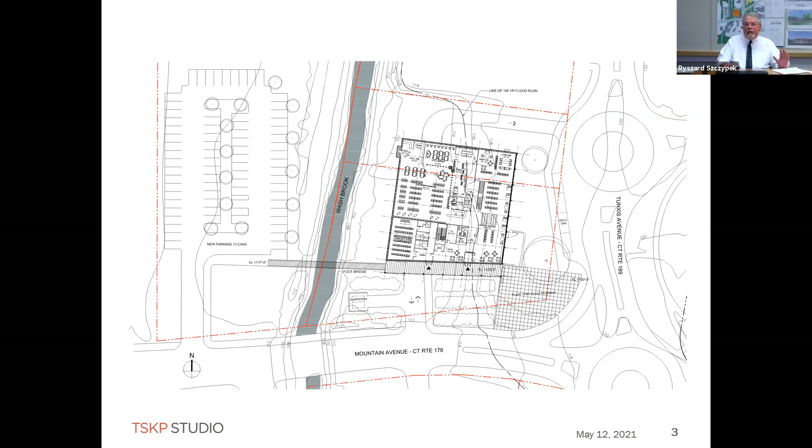So the concept here is to build a very strong connector to the parking area here. What we show in this site plan is approximately 73 cars—actually exactly 73 cars—in this former library lumber yard, connecting to the main level. There's a level below this floor plan, but this is the main level, the level that pedestrians would enter into the building. There are two entrances, as you can see here on the southern side of the building.

This is the main entrance into the library itself that leads into a vestibule and then into the main library room. The circulation desk is located here within plain sight of people coming and going. There's a secondary entrance as well, and this will become an important entrance after hours because it leads into the community space here, a meeting room. There's also bathrooms in this location, and egress stairs, which are important along with the elevator to connect to the lower level and the upper level. The library itself is divided into two floors.

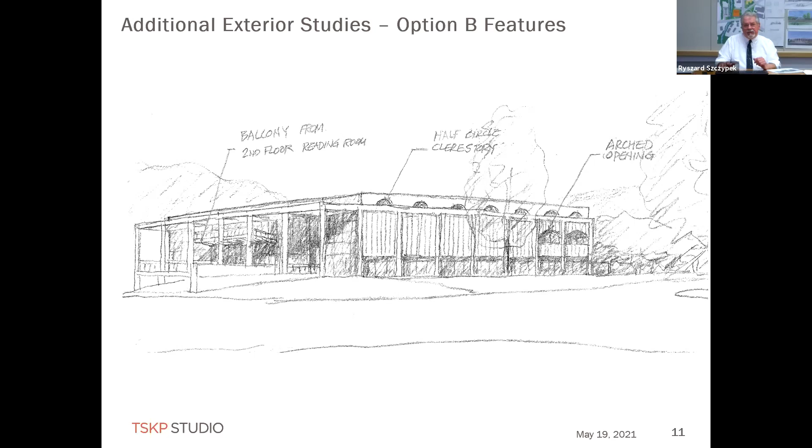We've been working with Downs Construction. They brought in a geothermal consultant as well as a photovoltaics consultant. So geothermal was eliminated from consideration, but photovoltaics are a very realistic option.

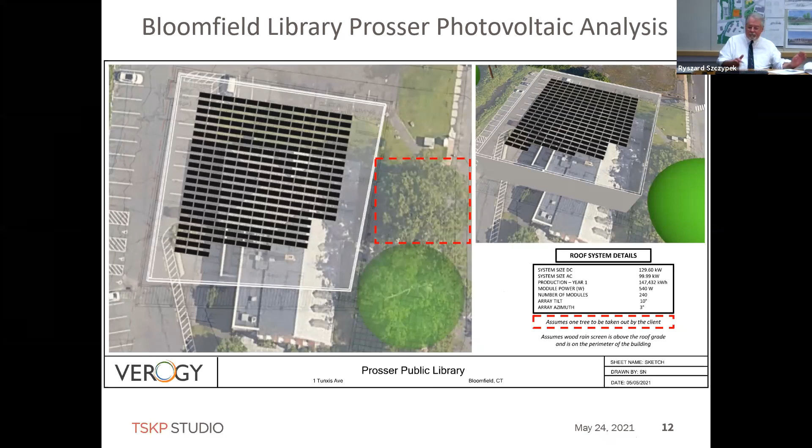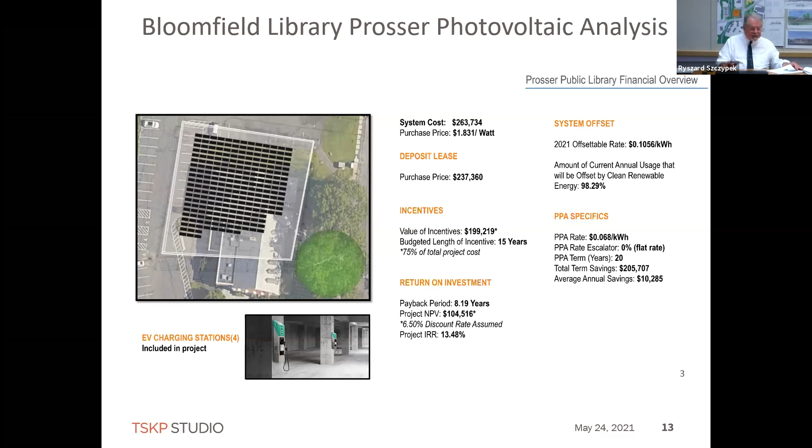Downs brought in a company called Verogy, who did a thorough analysis of the photovoltaic panels that could occur on this building. They described an ideal footprint to maximize the amount of photovoltaics for this building. The photovoltaics here would provide enough energy to serve the library building. They've even done some cost analysis and presented options to the building committee for how to pay for those photovoltaics, but that's still a subject to be discussed with the committee and the town council.

The shaded area represents the footprint of the existing building, and the unshaded area in front represents the new construction. This would be a new entrance and vestibule connecting straight into the building, leading directly to the circulation desk right in front. We'd be renovating the existing building to create a new teen and children's area, with the adult areas placed in front.

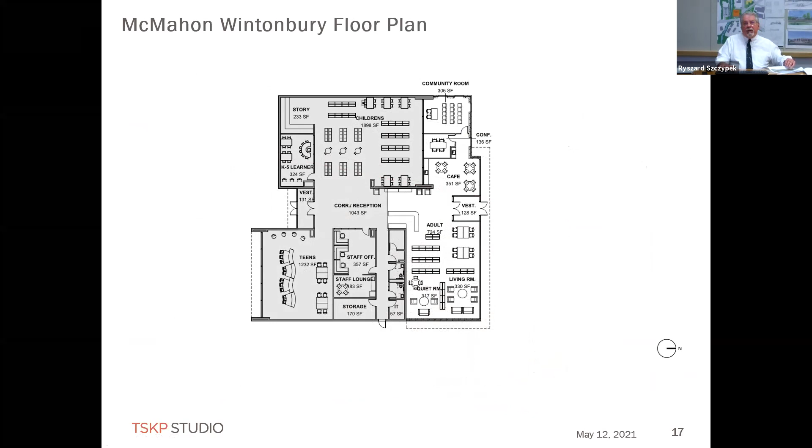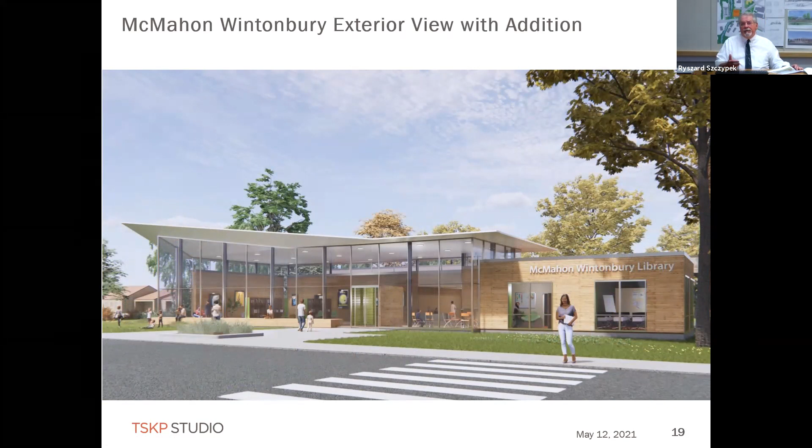We do have some renderings of that as well, which I will show you here. This is one view of the exterior, and looking at it from a slightly different angle is another view of this building. We did receive comments from this as well, and we'll be sharing some revised views. I think the building committee asked us if we could incorporate brick into this exterior rather than a different kind of material.

The plan is to go back to the town council. We've had one presentation with them. We're going back on the 14th of June, and then probably again on the 28th of June, prior to the library submitting a letter of intent to the State Board of Grants for library construction. We're facing a deadline of June 30th to do that.

I'm assuming the town referendum will be scheduled by the town council on November 2nd. After November 2nd, once the project is to be funded, we go to the rest of the design process before we start construction. The rest of the design process is probably 9 or 10 months of detailed work, starting with schematic design right after the referendum, and then going into design development.

During design development is when we start addressing a lot of the site issues that I'm sure are of great concern to this board, as well as planning and zoning and other entities in town—things like floodplain management plan, site utilities, traffic analysis, planning and zoning, wetlands, state and local environmental entities, DOT, etc. All of those get developed, and eventually we will be applying for site plan approval, and that won't happen until August of 2022. So that's where we are in the process.

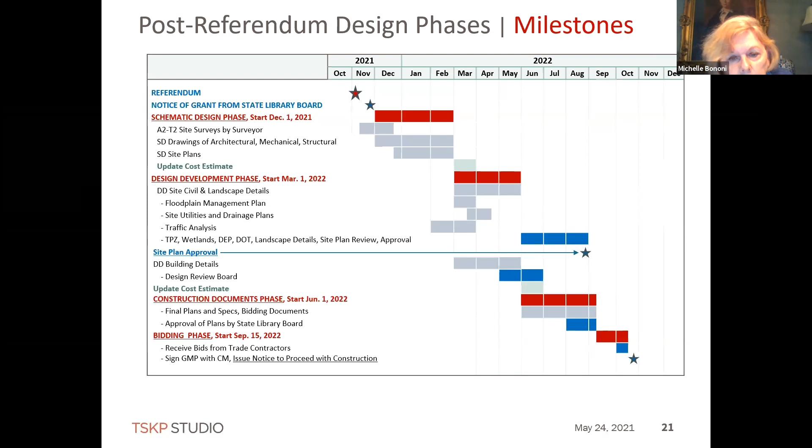Michelle, you want to start it off? I mean, I guess you're on the committee, so, but we'll go in alphabetical order. Oh, I'm not mute—on mute. Michelle, you on mute? Michelle, you're muted. You're still muted. I think I finally got it. There you go. Okay, I would prefer to, being that I have already given my opinions at the library committee, defer to my other committee members first. Give them the first shot.

Okay, Neil? Okay, thank you, John. Yep, thank you for the presentation. This is a big, significant project to sort of digest in one gulp here, and I'll try to be thorough, and yet I'd like to come back maybe later to talk about some things. I'm afraid I might hit this sort of in a shotgun fashion, but I'll start with something that John was talking about earlier in terms of pedestrian traffic and access to that corner.

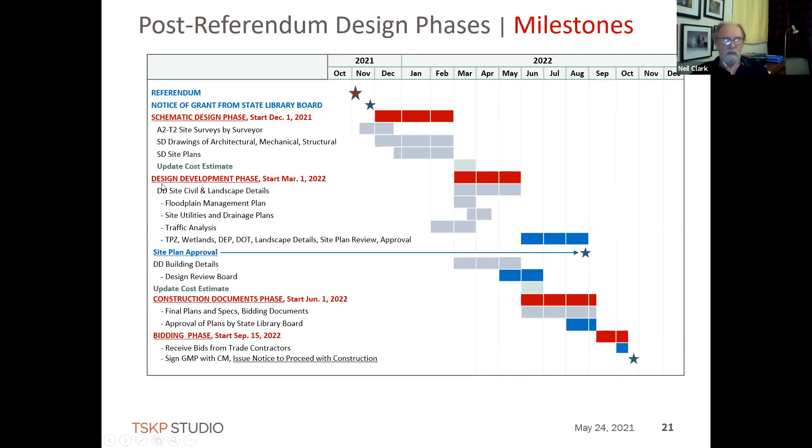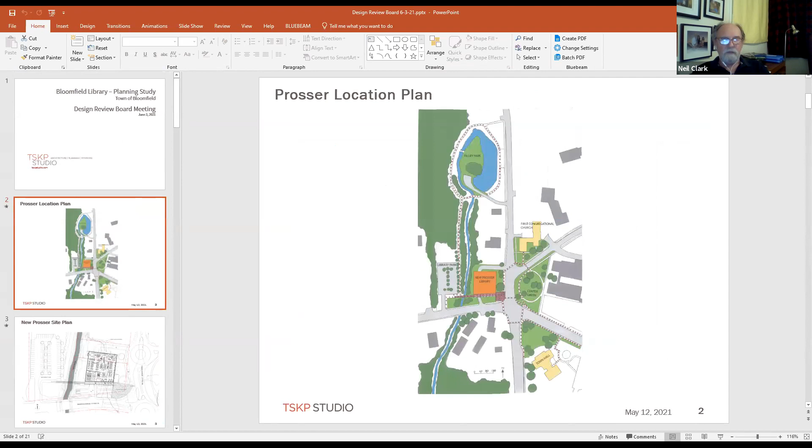I think it's vitally important to this concept that corner be related contextually to the roundabouts and the future pedestrian traffic involved within that roundabout configuration. Pedestrian traffic's going to change just because of the introduction of those roundabouts, and it's going to be an important consideration to get right, and to understand how pedestrians will navigate those roundabouts.

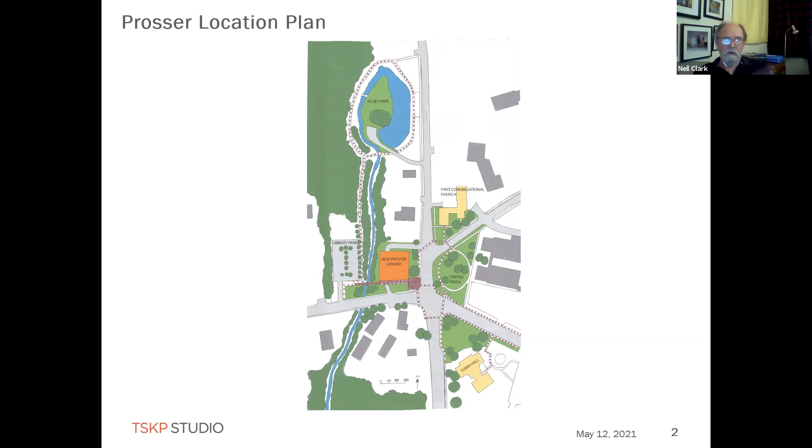You've talked a lot about the south side of the building and the importance of the colonnade, the portico, and yet the south side has this big gaping hole that goes into the underside of the building with a dumpster parked in front of it.

I think if that side of the building is going to be architecturally important, the whole building should be important architecturally. More attention needs to be paid to elements like the dumpster and the garage access underneath, and the landscaping. I like the connection to the Riley Lumber Company site, but I'd like to see it be more than just a little bridge and pedestrian walkway. I'd like it to make more of an architectural statement, something that reflects in different dimensions, maybe a little bump out where people can look at the brook.

Right now it just looks like a little pathway on a slope with a couple of railings on it. I know we're early on in the design of the exterior of this building, and there are opportunities here.

To change and react to what the public is saying, what our group is saying. I think that's good. I think this is a great time to interject these comments and let you guys respond to them. As far as the mass and the bulk of the building and some of the other relationships...

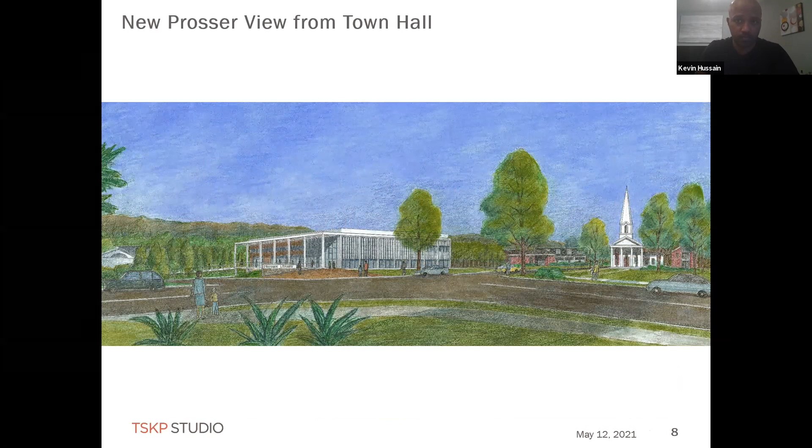You're talking about the lower level? Yes. This level? Yeah, the elevation view now, if you don't mind. There was another one, you had an elevation view. Oh, it was a section actually, a cross section, but similar to elevation.

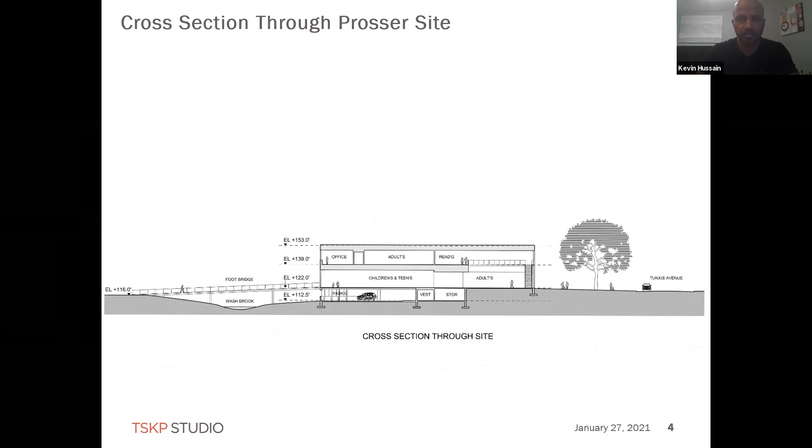Okay, cross section, right. I think this is the part that, like Neil had mentioned, about the dumpster being on one side, and if that's not as welcoming as you want to see. If you go back now to your south elevation view of your actual columns, I apologize, I just wanted to show the correlation here. If there was a possibility to shorten those columns, to move some over to the easterly corner, the southeasterly corner, so it connects into the town green.

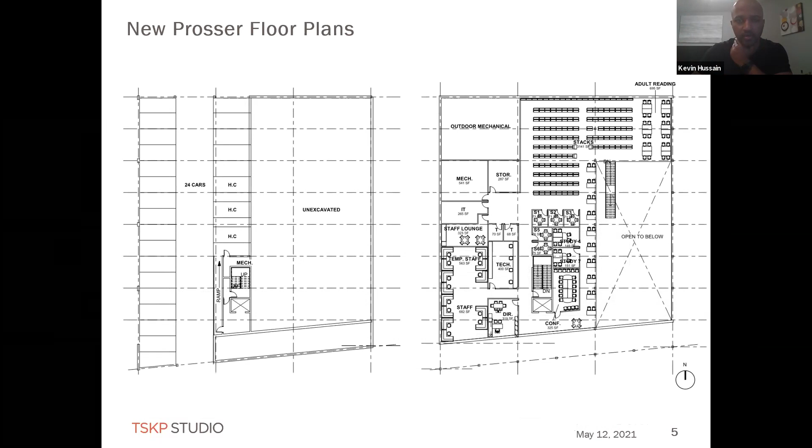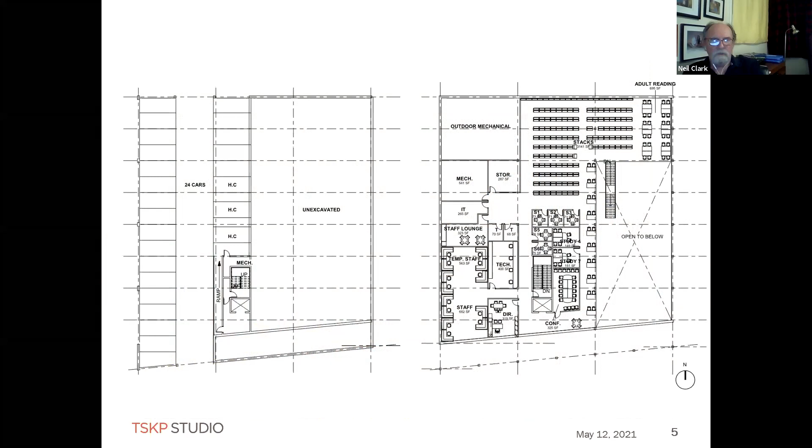Kevin, I think what you're looking for is the drawings, not necessarily elevations, right, that he showed before? Just go back to one of your sketches, one of your conceptual sketches, Richard. Yeah, the drawings... No, I wanted to see that cross section too, I thought the cross section showed the columns. If you keep going one more time, I'm sorry. Okay, the proposed new sketches, I apologize, I should make note of the pages. The sketches you showed, yeah, the sketches you showed. Whatever your last rendering that you showed, it probably showed the arches in the cutout too.

Yeah, like even this one right here, if you go back to this right here. Now these columns, I assume, are trying to carry the dead load of that extended roof, correct? Correct. And that's the only load it's taking on right now, right? Correct.

Yeah, there is some load carrying capacity there, but what I was saying, right where that tree is, we don't want to take it down obviously, but if there's at least a small connection on the eastern side to the town green across the street, I think that would be a little more welcoming, because folks will, instead of staring into these apartments, find it easier on the eye if they look across to the easterly side. To me, the easterly side is easier on the eyes versus the apartments to the south. But I understand the concept where you're going there, that's just something I wanted to throw out on my part.

Like I said, I love the connection with the town and the church, and I don't need to see a lot of bricks too. I'm of a younger family and a younger generation, my kids use this a lot, and I think this would be more engaging and welcoming to them, for that demographic I'm talking about.

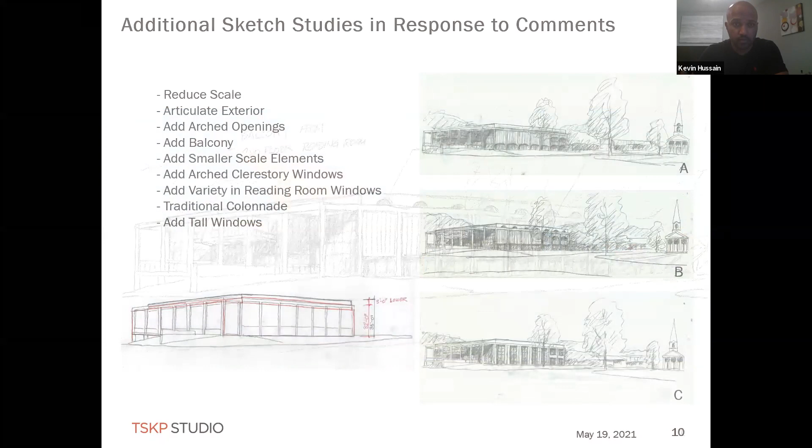I like the idea, I like how welcoming this is, and I love how you've tied in the old with the new and updating it. I was just concerned, though, the previous parking was more perpendicular to the street, and this new proposed parking is a harder angle—not necessarily the right turn, maybe the left turn in—but you're trying to make it parallel to the building.

This was an effort to demonstrate how much space is required on the site. We looked at different things—we even looked at the possibility of a new building on the site. So we were space proofing the site.

Honestly, this was not done by a landscape architect with any kind of thought that is required for a proper site plan. Your observations are absolutely right on the money.

The existing parking is normal to Rockwell Avenue, at right angles to it. I don't think there was a lot of thought given to the angles here. Making it parallel with the building may not make as much sense as keeping the parking at right angles to the street.

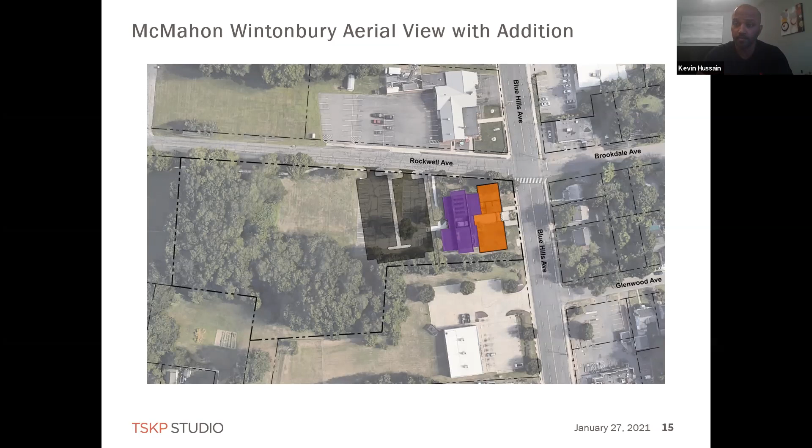If I can answer first, from my perspective, no. I really welcome your comments because we will share them with the committee as well as the town council. We know this is a process we need to go through. I promise we will come back and continue this kind of dialogue and detailed exploration. So no, you're not holding us up.

Okay, all right. Can I just add that from a regulatory point of view, the answer is no. Your board doesn't have any formal process until they have to come in for site plan before the Planning and Zoning Commission — that's where the zoning regulations come in. This is the village, not on the McMahon side. On the town center side, it's a village district by definition, and it does have to come back to the board for a recommendation to the Planning and Zoning Commission before they can act on it.

So, Aaron — and the last thing I want to add is for my other two board members who are also part of the library board committee: just be mindful of what you say, because it could create a perceived conflict of interest. I just wanted to say that. Thank you.

Thanks, Kevin. Mark, do you want to make comments now or you want me to go? I prefer if you would go. Thank you, okay.

Well, from my perspective, I support a lot of what Neil had to say. I think the way it's designed now, you're either going to love it or you're going to hate it. Obviously, if it's constructed as proposed, I wouldn't want to call it controversial, but it'll certainly be a discussed building in town.

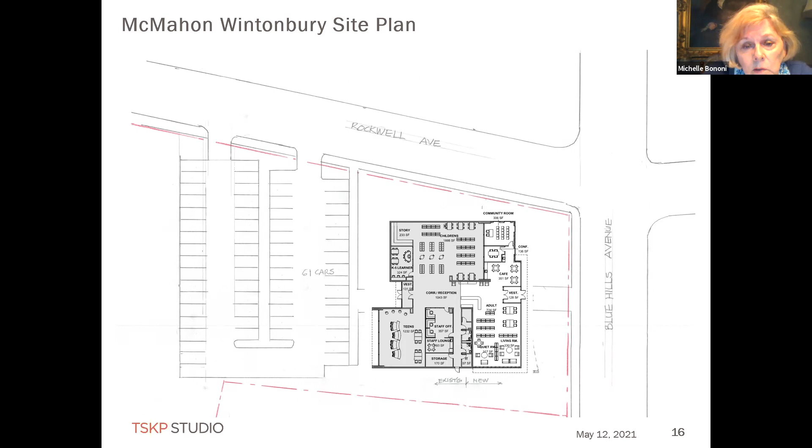Mr. Chairman, I would just like to thank you for your comments with regard to conflict of interest, because I take conflicts of interest very seriously. However, I would represent my own opinion with regard to conflicts of interest, although I thank you, Kevin, for including me in yours. I believe there are a lot of considerations that should be made on that issue, but it should be under discussion with the board itself. I have no problem with it because I feel I am disciplined enough to separate my review duties, but I would be willing to listen to anyone who has a concern, certainly. So thank you for addressing it.

Thank you, Michelle. John, I don't know how to raise my hand, so can I just do it like this and make a couple more comments? There's also down on the lower, at the bottom of the screen, there's a raised hand icon. I've been looking for it, it's hidden on my screen or something. Yeah, there's a conspiracy to hide these things.

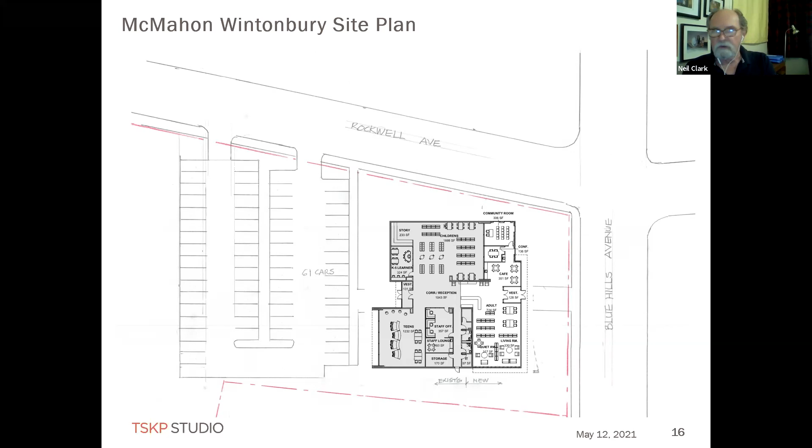Wanted to say a couple of final things. The love it or hate it notion—I'd like to dispel that whole concept. I'd like us to have a building here that we're proud of, that has gone through a process that's yielded something that, nobody's going to love everything, but I think this building is important enough that it has to come out right. I don't mean to pick at your words, I'm just trying to spin this in the direction where our process has got to work. And I think the other thing is our process is supposed to be designed to help the applicant move in a direction that, and hopefully we've been able to help them tonight.

I love Michelle's idea that landscape design and site development has to be integral to any successful design. It's a shame a landscape architect wasn't in the budget for design at the beginning. I'm not wagging a finger at the building committee, but we designers and architects know that site development, building placement, and critical notions that arise from analyzing a site are keys to a successful design.

So Michelle's right on the mark with that comment. We do ask our other applicants to make sure they've taken a look at landscaping, building placement, and relationships of elements on the site. So I think we're being consistent that way, John.

Thank you, Neil. Any other committee comments before? Kevin has his hand up. Go ahead, Kevin. I had my hand up, but Dick went ahead, that's okay. We're good, Dick's not here anymore. Sorry, Neil, I apologize.

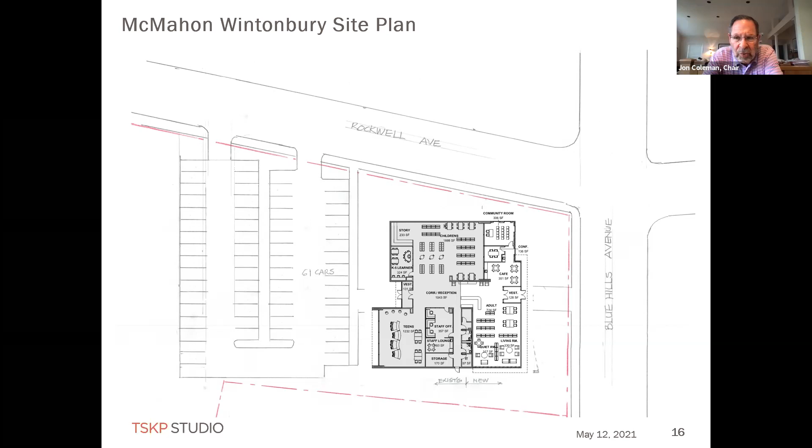I do. First of all, I want to thank everyone for the thoughtful and intentional feedback and comments. Those are very helpful, and the committee will take that back, digest it, and give it serious consideration. I also want to say it's my position that this building has to be warm, inviting, and open, and I think that was echoed tonight.

We are embarking on something new and different for the town. When we did our surveys, we had 1,700 responses, and almost a third were from young people, students. I tell people all the time that this library is being built not for me, but for my children and their children. I think the younger generation wants a modern 21st century library. That doesn't mean it can't have some features of this old New England town, but our young people, who will be using this building for the next 50 or 60 years, are looking for something different than the traditional Windsor or Simsbury type library building.

But again, we are very open and willing to take this back to the committee, and want to thank you all for your time and for this process. I do agree with some of the comments about work that will take place in the future with respect to landscaping and traffic. All those things are on the timeline to happen, and we really appreciate your time and everyone's feedback. So thank you.